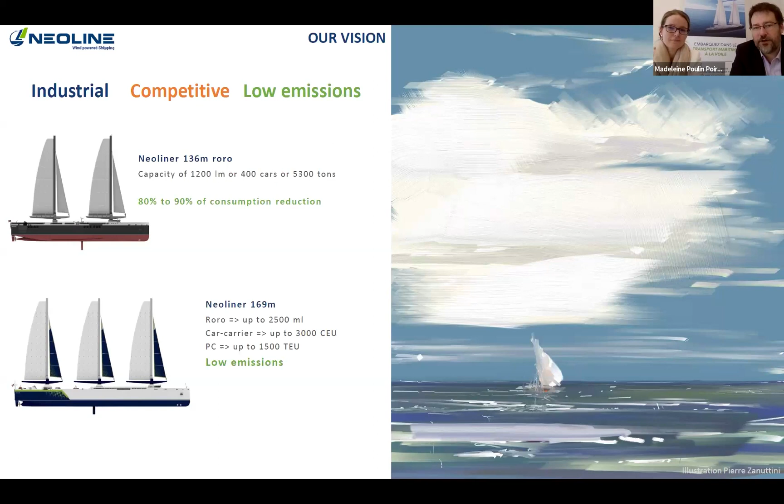A brief recall about the context.

The maritime shipping sector is an industrial sector that emits about 3% of CO2 in the world, which is not so much if you compare it with the amount of goods that maritime transport carries, because maritime transport carries more than 80% of goods in the world. But it is quite a lot in total, because it is equivalent to the emissions of a country like Germany. But maritime transport also has a lot of constraints, more on the regulatory and societal side.

This is also a sector which is strongly linked to fuel costs, because most of the time fuel cost represents about 50% of the global cost of a vessel. So if the oil price rises, then the transport price will also rise. And there is a third factor to take into account: maritime shipping is currently concentrated a lot in terms of services, because services are fewer but bigger in size, and also in terms of cargo owners, because there are fewer and fewer owners, but also bigger in size.

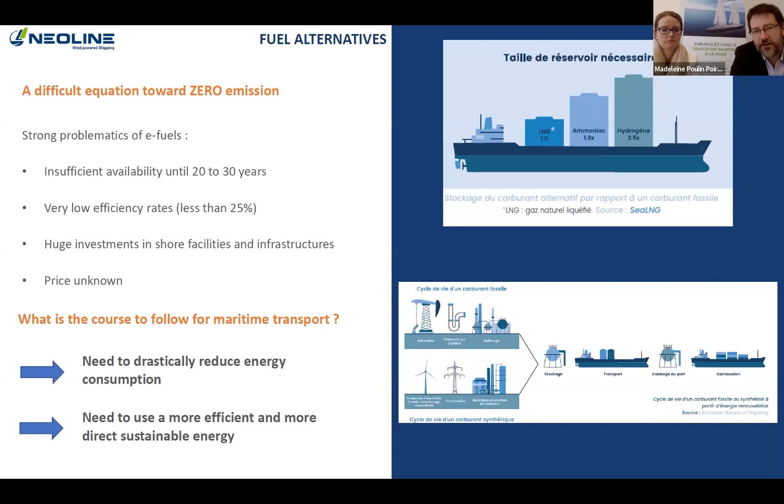Wind is available everywhere. Of course it changes, but it is predictable and available for free everywhere. It is very efficient because you directly transform the wind energy into thrust force for the vessel, propulsion thrust for the vessel directly, only through the sails.

But if you compare this with electric fuel made from wind energy, you can see in the bottom part of the presentation that it is a very long way from the wind to the thrust force on the ship, and so there is a lot of loss all along the line.

So wind energy brings a lot of advantages. Wind does not have any adverse side effects, does not make any conflict in usage, comes free of charge, and gives independence to fuel production. So these are very, very strong incentives. This is why wind energy is currently used more and more, and is rising again for the shipping industry.

We are not the only project talking about using wind energy, and we are working together in the International Windship Association, in order to put light on all these initiatives to decarbonize maritime transport.

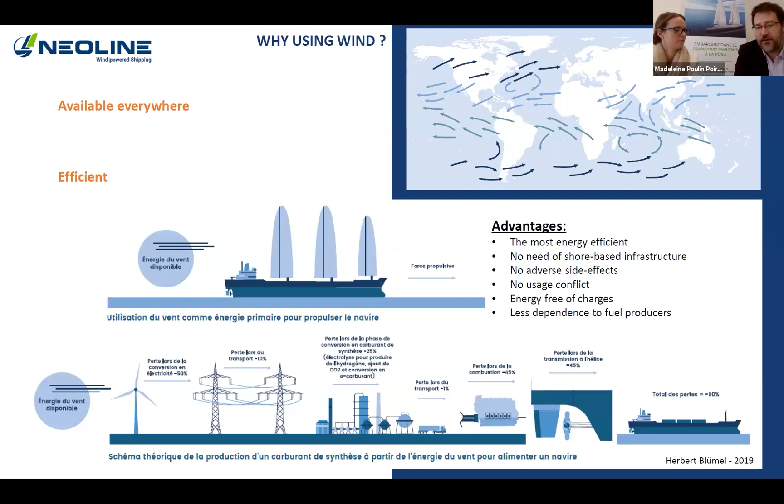So more specifically about our company: our company is in fact two companies. The first one is Neoline Development, which was created in 2015 in France. It's a small company with 10 experts, and the company developed all the projects. So the company developed the first Neoliner project and developed the next and future lines. The value proposal of this company is to really blend together the engineering side and the operational side. So we have three axes of development.

We are developing sailing cargo ships. We are developing maritime transport lines, and we will operate these lines for our clients. And we are also developing some bricks of technology that can improve our vessel and our operation. The company is largely owned by its founder under the holding Neoline and Associates, and other investors from France.

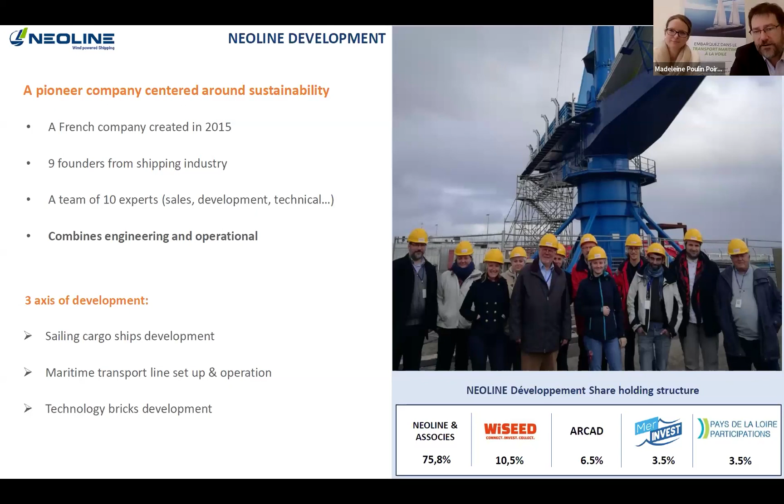And we also created another company, which is Neoline Armateur. Neoline Armateur financed the first vessel, and Neoline Armateur will be the first ship owner, the owner of the vessel, and the operator of the shipping line. Neoline Armateur was created in 2021, and Neoline Development provides Neoline Armateur a ship management service.

Neoline Armateur brought more money, of course, to finance the vessel. You can see here the shareholding structure with two major players: CMA CGM, a major container shipping company which is also well known in the US, and ADEME Investissement, which is a state-owned company but acting as a private investor in this matter. Neoline Development is also a minority shareholder, as you can see in the shareholding structure of Neoline Armateur.

The financing was also made using the support of CIC Bank, which is a French bank, and guaranteed by a state French bank, BPI France. So it's a blend between private and public investment in this project.

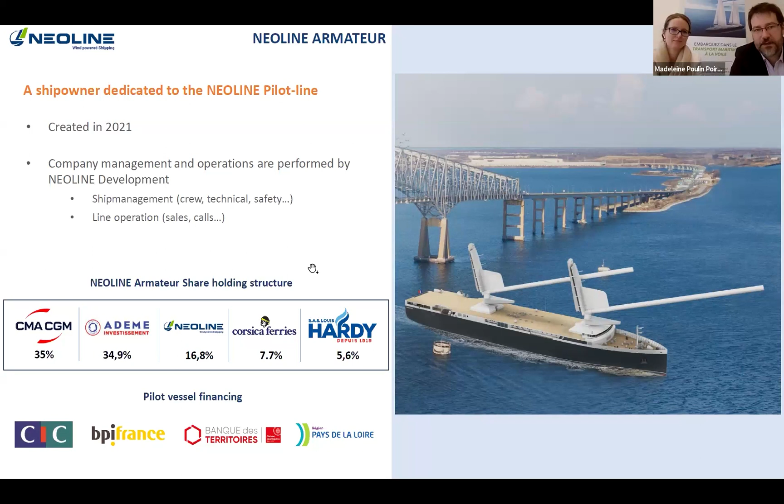And I will give now the floor to Madeleine in order to present you more what is the product itself, what is the line, and the service we'll propose to you in the next year.

So the new line that we're going to put in place in 2025 will be served by a new vessel, a ro-ro vessel, but with huge sail. The vessel will be a 2-mast with each sail representing 1,500 square meters each. And the solution will be a combination of 2 elements put together, or actually like 2 decisions.

First, of course, with the sail, we're going to use the wind as main propulsion, but not only. We're also going to reduce the speed. This is what we call slow steaming, which means the vessel will cross the ocean, but we're going to give it a bit more time compared to a similar sized vessel.

So the sailing ro-ro vessel and crew will be able to use a little bit more time to find the correct course to cross the ocean, to have the correct wind push the vessel on the other side, basically. And also we're going to have enough time to do weather routing.

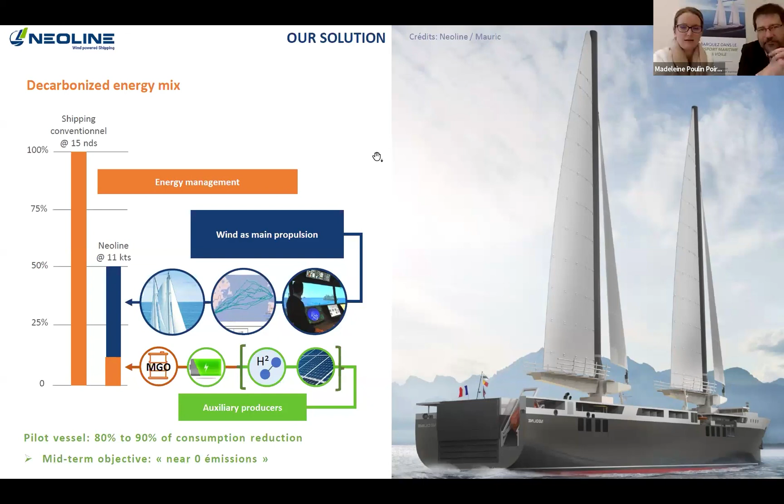Okay, so now you can see the main particular dimension and characteristics of the vessel. So the vessel we're going to use is a ro-ro vessel. For those not familiar with the term ro-ro, it means roll on, roll off. Basically there's a big ramp at the aft part of the vessel, pretty much like a ferry. So the crew, when we get into port, will lower the ramp, and then any equipment or vehicles, cars, or trucks will be able to roll inside the vessel, roll out and roll in as well.

So we call it the Neoliner 136. This is because of the length of the vessel—it's 136 meters long. It's going to be 24 meters wide. I spoke already about the sail, and you've got the detail on the engine and about the speed.

So when I said we were going to do slow steaming, we calculated the crossing of the ocean at about 11 knots. But with our engine, we can actually do 14 knots. So the important part here is to say we are able to make it in time on the other side of the ocean. The vessel will have a huge air draft.

This is how tall the vessel is. But it's important to mention that those two masts will be able to tilt and get into an inclined position. So we will reduce the air draft of the vessel, allowing it to pass under all of the bridges to be able to reach the ports.

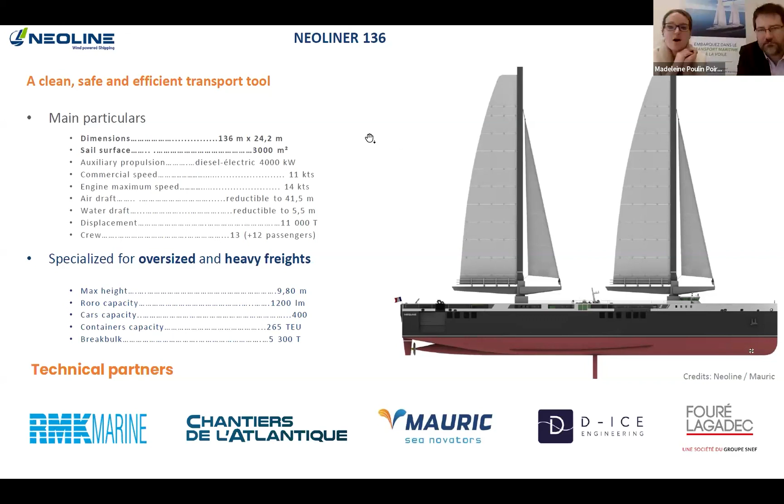So it's going to be possible for us, with good transit time and no transshipment, since we don't need to go up to Rotterdam and Antwerp on that line. We can deliver your goods directly to the west part of France. So that's the new hinterland connection.

And we're in the northern part of the Atlantic, so this is perfect for the wind where we are.

So you have a couple of examples: either some rolling equipment, for example for Manitou, there's cars and containers. It's all a mix of everything that we can load. And those shippers share the same value, it's really important for them to reduce the carbon footprint as well.

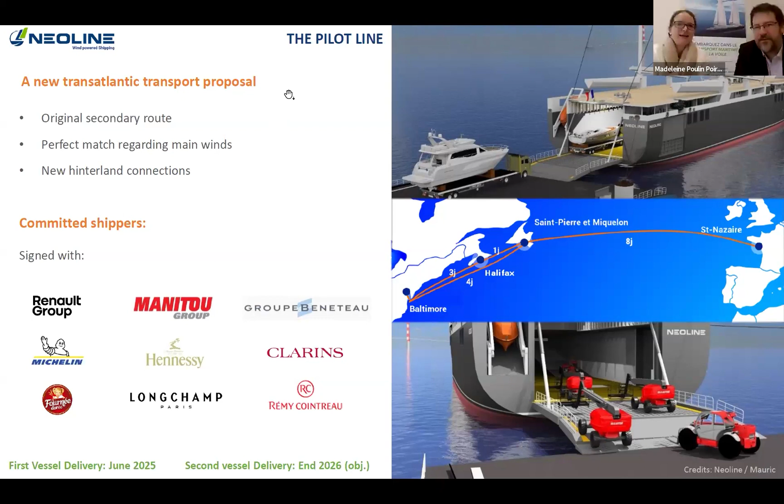Then the launching of the hull will be held in December 2024, for a final delivery after all trials and all installation with the mast and everything, on the 6th of June 2025. The vessel is currently built in Turkey, so we'll take delivery in early June, then bring the vessel back into Saint-Nazaire by the end of June.

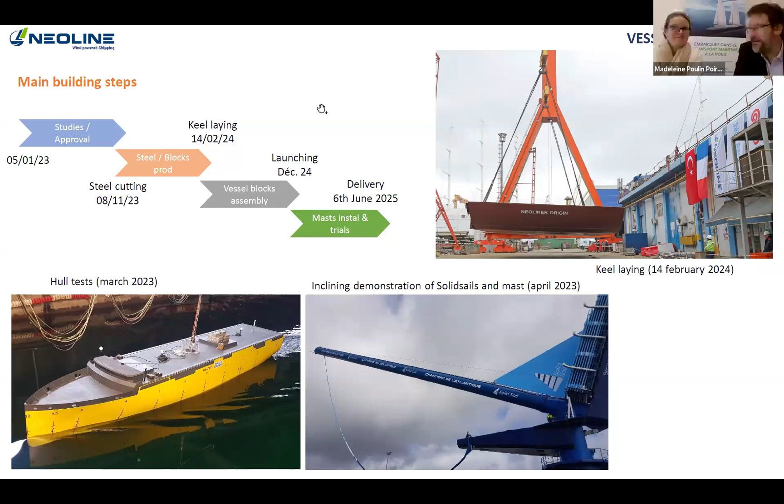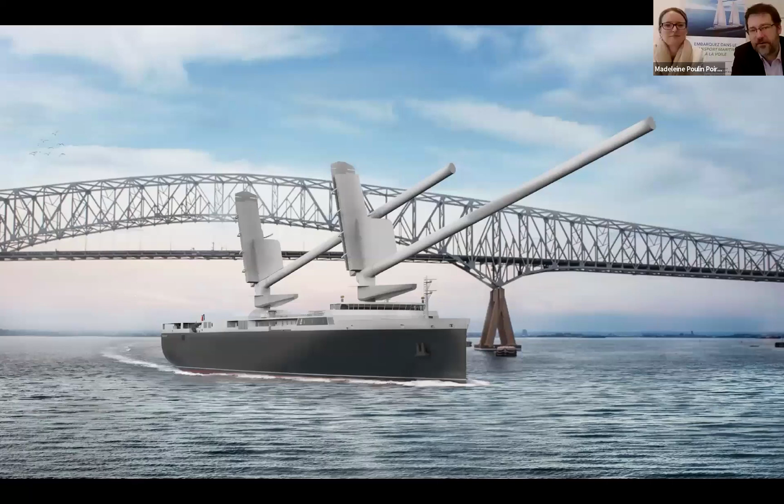And here you have a few pictures. Of course, it is a 3D rendering of the future vessel crossing under the Baltimore Bridge to show you a little bit more the size of the vessel and the masts when they are tilted down. And here you have the vessel at sea.